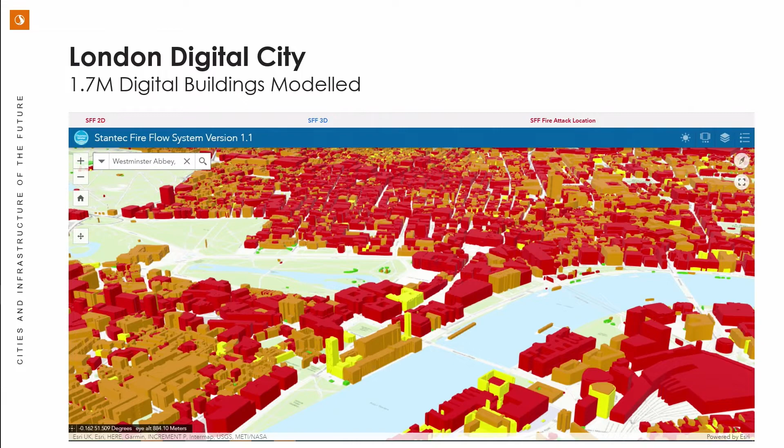Now, the individual digital buildings, you can see we were able to map the external geometry of the buildings pretty accurately. Some of you might even recognize you're in Westminster, you're looking at the Houses of Parliament and Big Ben next to the river, and then a little bit further back and to the north, it's Buckingham Palace at the end of the Mall. So we then embedded the fire codes, or in the UK we call them the National Firefighting Guidelines, into this system so that we could calculate the fire requirements in each individual building. I'll come back to that in another couple of slides.

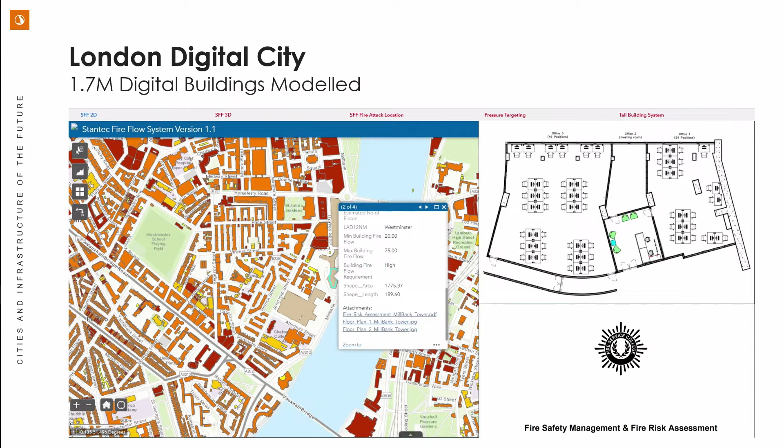But also, our digital system had some side benefits. We were able to embed important information to support firefighters in individual buildings. So here's a large tower block in Westminster, and we embedded the different floor plans for that building, and the fire safety management and fire risk assessment for that building. And we also can embed information about the firefighting infrastructure or fire escapes.

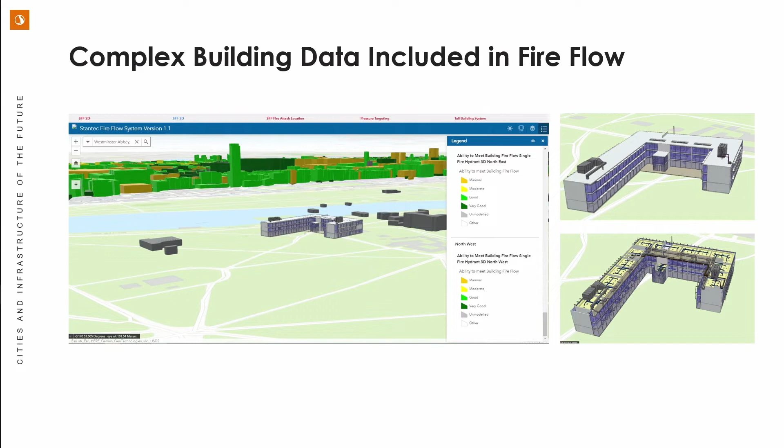And we can take this even further, and we can build complex geometrical models of buildings inside the digital city. You can literally fly through them. You can turn walls and floors off and study the internal architecture of the building. Where are the staircases? Where are the fire escape routes? Does it have sprinkler systems or hose reels? And we can attach information to different parts of the building which might be relevant to firefighting.

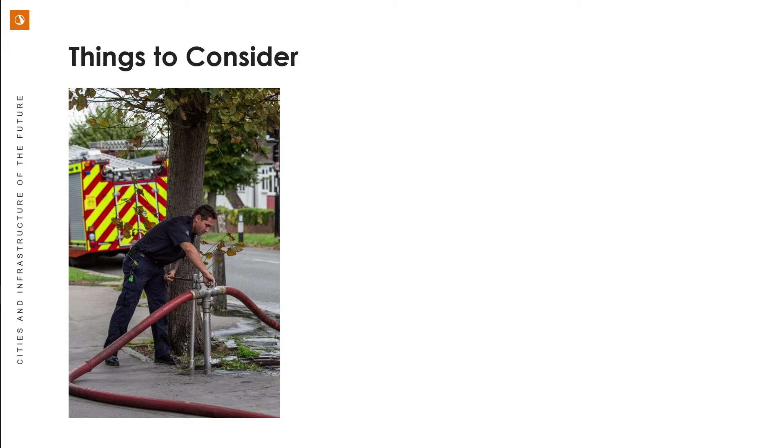That's the digital city. So the things that we need to consider to answer the questions that were raised by Grenfell, these are the things. So first of all, the fire services have certain protocols about how they fight fires. They're fairly generic amongst fire services around the world. There are rules to how they set themselves up to fight fires, how many hydrants they will connect to, how many hoses they will run from a hydrant, whether they'll consider using a hydrant in case there are obstructions to laying hoses. We'll come on to that again in a minute.

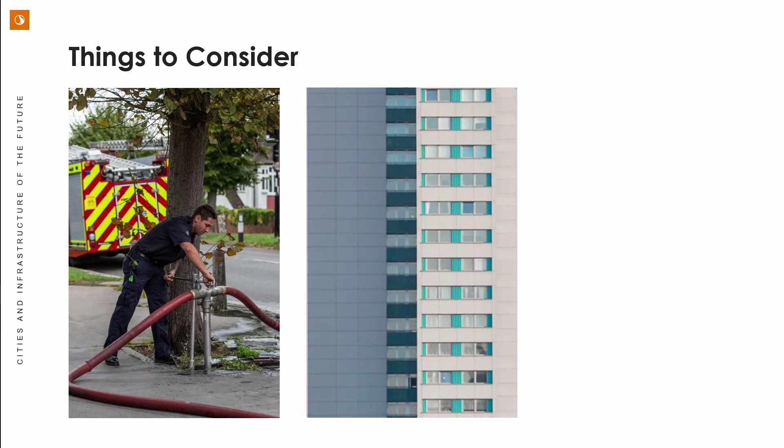Also, you need to know about the geometry of the buildings. Okay, so we have that from the digital city. We know how high the buildings are, and we know the footprint of the buildings from that already. And you need to know what the use of the buildings is. That fits into the fire codes.

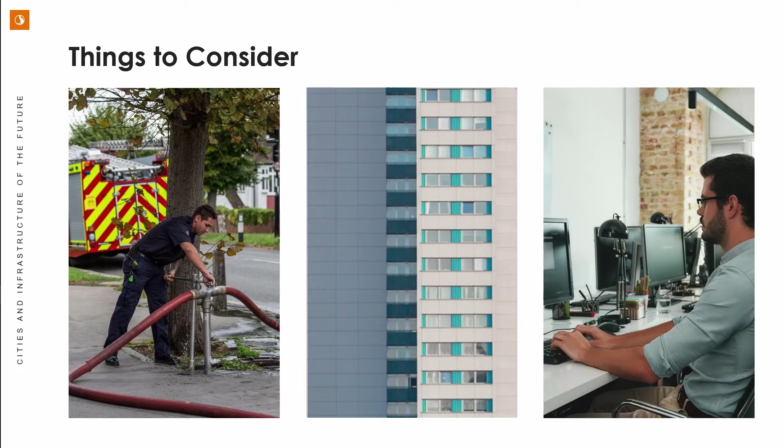Now, we were able to map the customer database from Thames Water into our digital city, because they keep a record of building use, because they charge people differently depending on how the building is being used. So we mapped that to the digital city, so we had all the information to calculate the fire requirements of individual buildings. Now we needed to find out how much water was available to fight fire.

So we built a digital model of the entire water supply system. But network models normally just tell you about pressure and flows in the systems. These are fire models, so they're specifically set up to analyze fire flows for individual buildings.

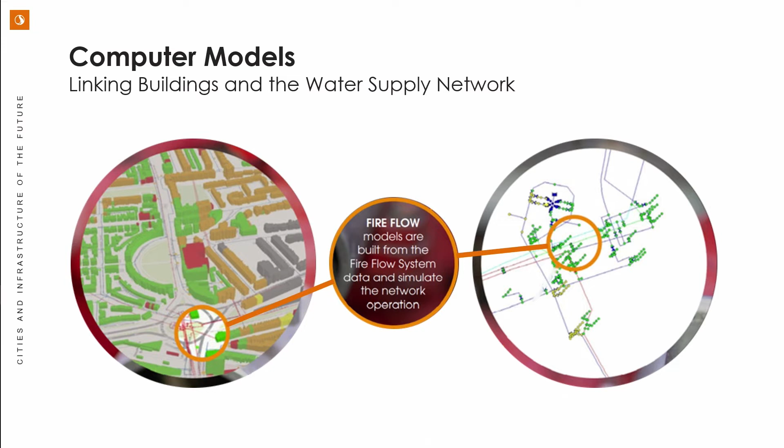And then we built this whole system into what we call the fireflow application. So what does the fireflow system do? So this is an online system available 24/7, which the fire brigade can log into, and it calculates the fire flow requirements for every individual building. It analyzes the network to identify which hydrants are valid.

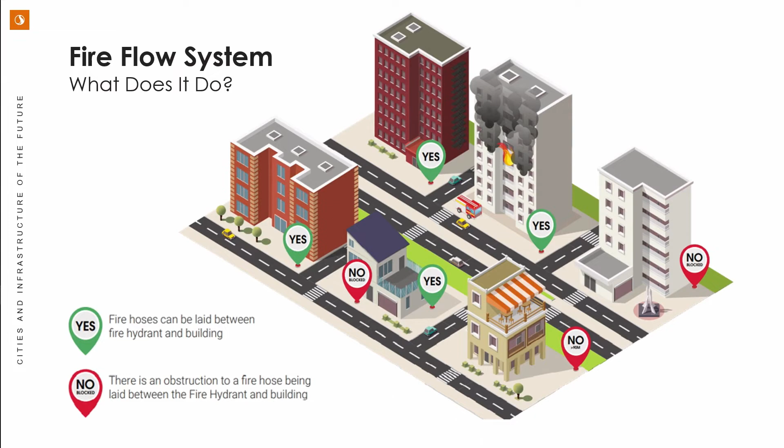So basically, if the fire hydrant's too far away from the building, or there's an obstruction, like a major highway, railway, tram line, canal, river, any water body in fact, they won't lay a hose to that hydrant. So it only analyzes valid hydrants, and then it will calculate the best volume of water you can get to fight a fire at that building from those hydrants where you can lay hoses to.

If the building fire requirement is too high, the building goes into a risk register, and then the fire brigade can take mitigation measures to fighting a fire at that building. It's a live system, so the dispatch can access the system, and so can the fire engines, so they can actually pick the location in which they want to fight a fire at a building, and then it will draw the routes to the best valid hydrants and calculate the maximum volume of water that they will be able to achieve at that location to fight the fire.

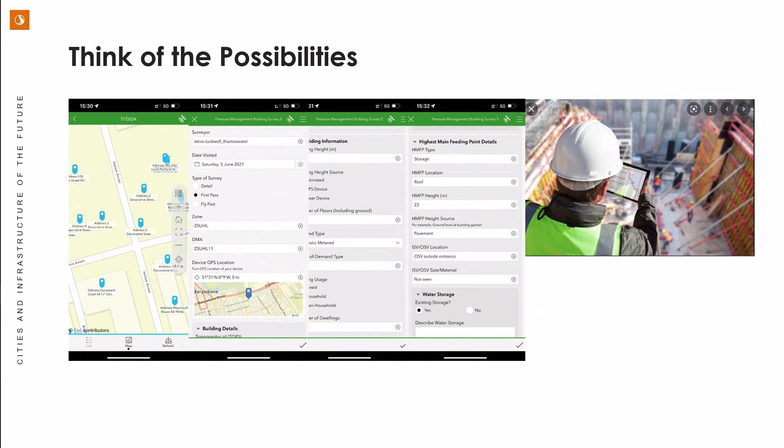And just think of the possibilities. So we already have an online survey system which links into this. So you can load it onto your phone or onto a tablet. And so you can see here on the right-hand side, our engineers can identify buildings when we want extra information about the building. That goes to the surveyors in the field, then they use the app to enter that data about the building. So how many stories, what's it being used for, does it have fire tanks, fire boosters, that sort of thing. They send it back directly into the fireflow system, and it gets embedded into the digital building.

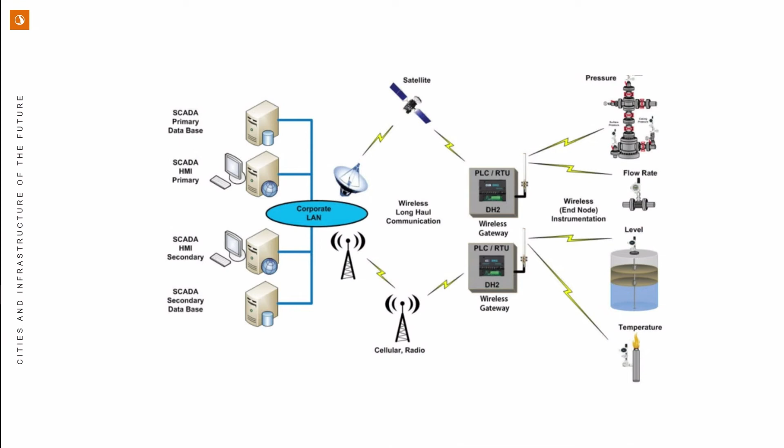At the moment, we suck the SCADA data in out of the Thames SCADA system into our fire models, and we run them intermittently and update fireflow. But we know we can link these two in real time so that we can run the models as and when required. It's 6 million model runs to cover the whole of Greater London. So we only want to really do the models when we actually require the information. And that's something that we're planning for the future.

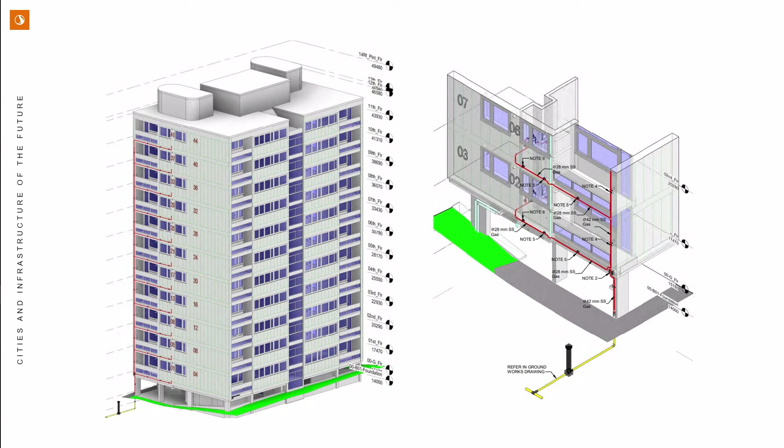So our fireflow system is part of our smart networks initiative. It's a system that we've built where we can analyze the relationship between infrastructure and buildings, identify risks, and then take mitigation measures to improve safety and resilience of cities. Fireflow has been used to test planning applications for new developments. And actually during COVID, when they converted a major conference center into a COVID hospital, they used fireflow to test whether that was a valid conversion, that there was sufficient fireflow for a change to that use.

So at the moment, fireflow covers all of Greater London. So 1.7 million buildings, 8 million people. In a few weeks' time, we'll start to roll that out across the whole of the Thames estate. So this time next year, it will cover 15 million people, just under a quarter of the entire UK population, about 4.5 million buildings, and 9 more fire services. So there'll be 10 fire services who have 24/7 access to this system to pick up information about fireflow.

Now, I always say about this system, when I'm asked, this system doesn't stop disasters. This system gives the information to the fire services about certain specific risks, which they then can take action to mitigate, and hopefully then there's no disasters and I won't get one of those phone calls again.